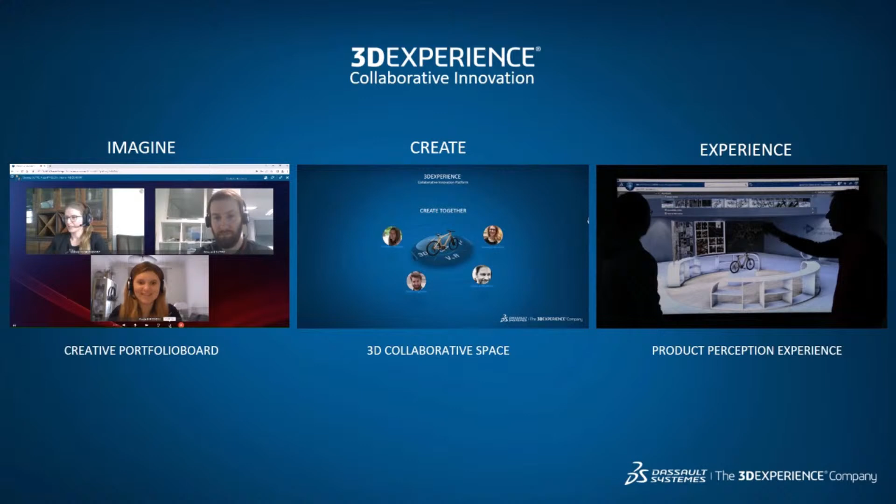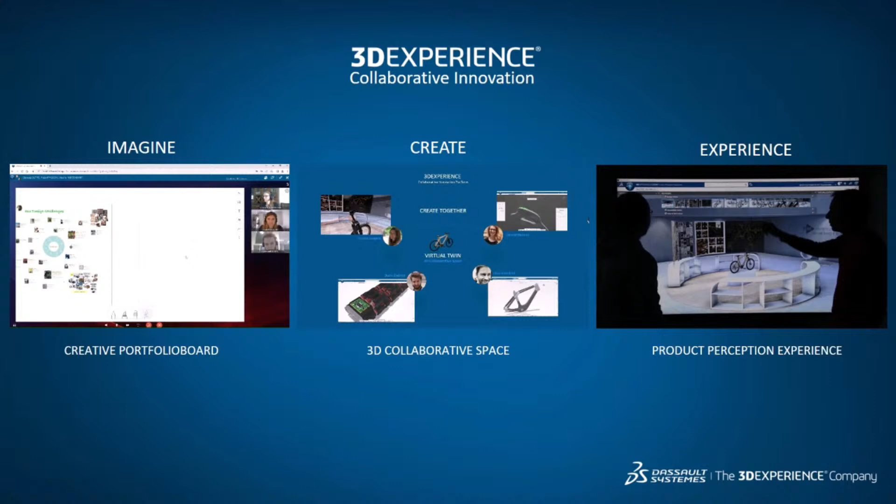It starts by imagining together, and we have applications like 3DSwym Communities with conversation, video conference, but also Creative Portfolio Board, a new application to do collaborative whiteboarding, to brainstorm all together even if you're in different locations and facilities. But then it's about creating it together, or co-creating together.

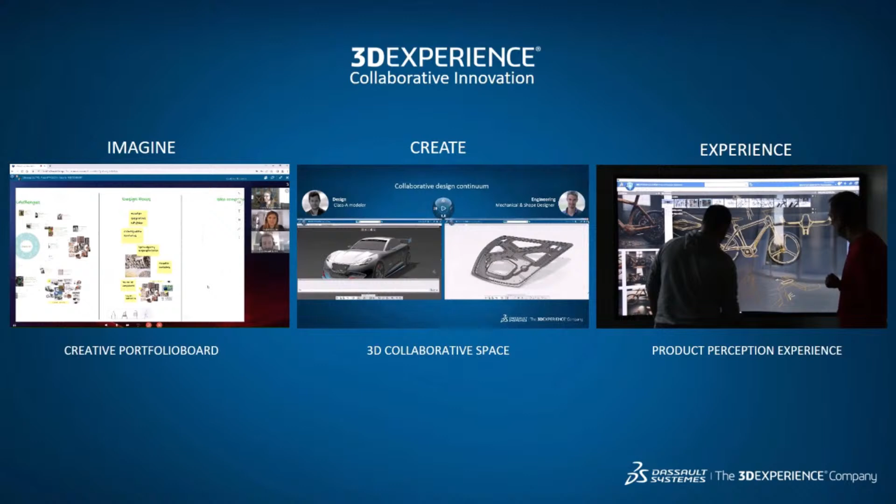And for that, we have on the 3D Experience platform the virtual twin, where everybody can connect to bring their talent. You can be a creative designer, a color and trim designer, a studio engineer, a class A modeler, or a decision maker. And you can work seamlessly all together to co-create on the virtual twin.

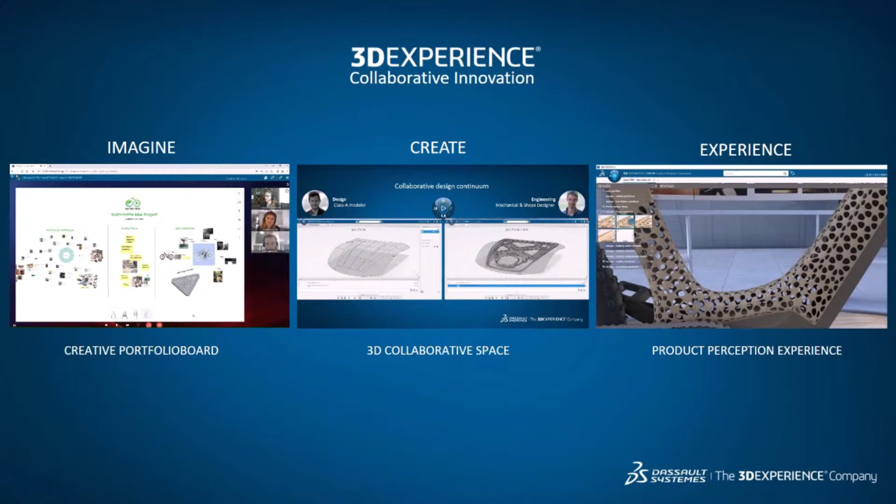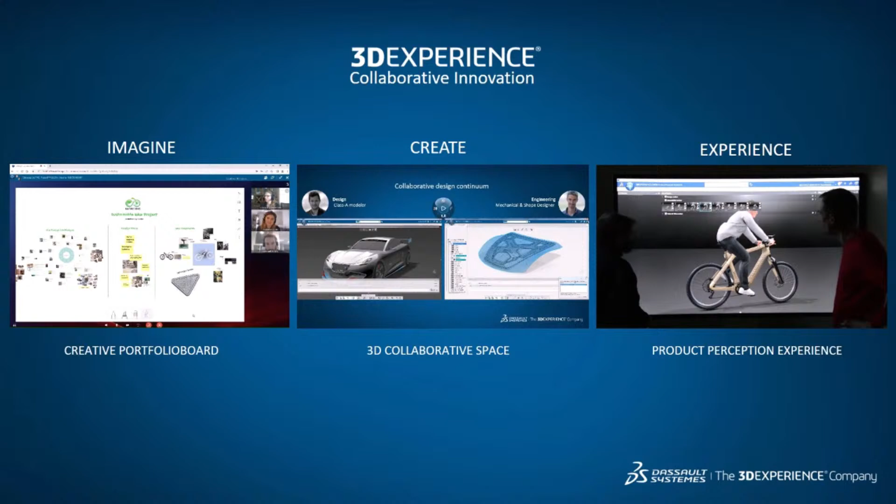And third, to experience together on the 3D Experience platform at any time of the project and the evolution of your virtual twin. You can meet all together around the virtual twin to visualize it, to experience it on screen, on touch screen, or virtual reality, to check and decide on the different experiences that you wanted to imagine. So the platform is the first element of this new studio of the future.

The second element is the daily job of the design studio, how to imagine, create, and experience in a unified workflow environment. And this is where our 3 disciplines are mandatory.

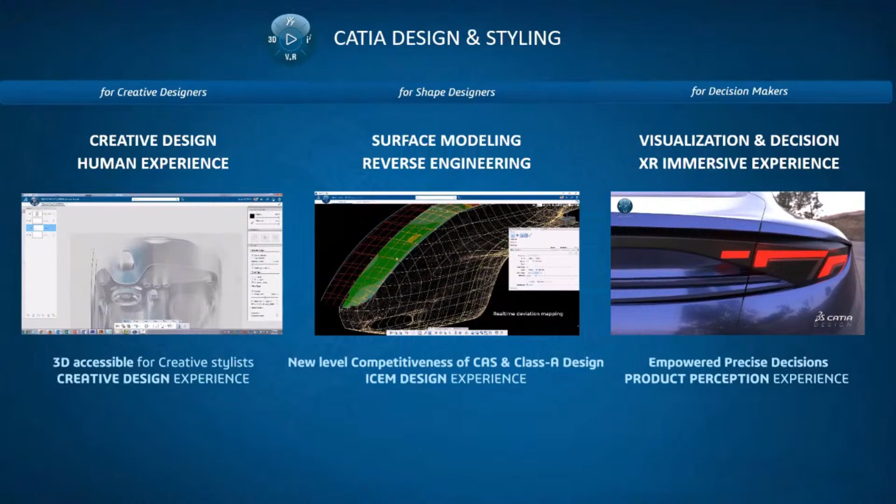And for that, we have created the fundamental pillars and applications: Creative Design Experience to give 3D accessible to creative designers, ICEM Design Experience to give the next level of productivity and competitiveness to do 3D modeling from CAS to class A, and also Product Perception Experience to present, brainstorm, and make decisions on the virtual twin. And this is what the team will present today.

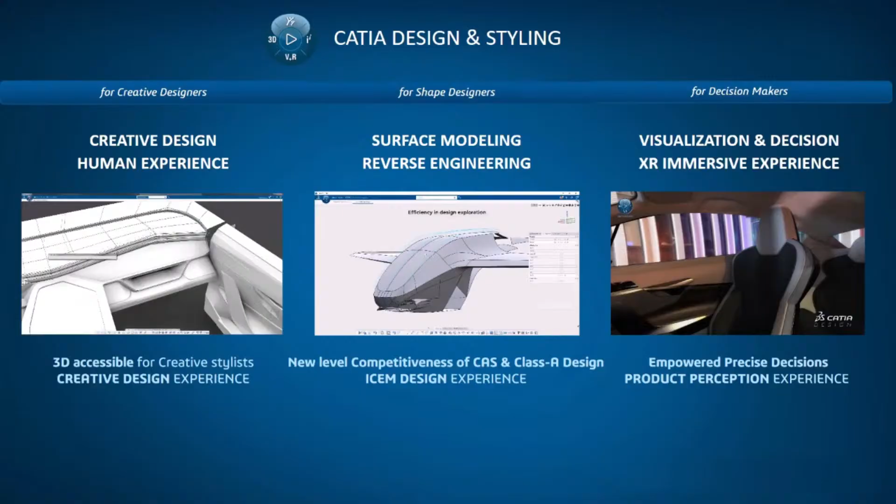Okay, so this looks very promising for the design studios. And you mentioned an interesting benefit, which is the unified design workflow, starting with creative design. So François, you are director of this part of the portfolio. Can you tell us more about it?

Sure, Alan. So what is important to understand is that our mission is to help our community of users transition from product design to experience design thinking, like Xavier said earlier. First, by delivering to our community of users the proper tools to help them innovate during their creative design process, by providing innovative technologies mixing curves and surfaces together to go further and faster into their design exploration.

Second is to turn to the human experience approach, thanks to the virtual human, to start to evaluate the consumer experience of the product our designers are creating. And third is to take full benefit of the new approach of design by algorithm, which is very powerful for design exploration and automation.

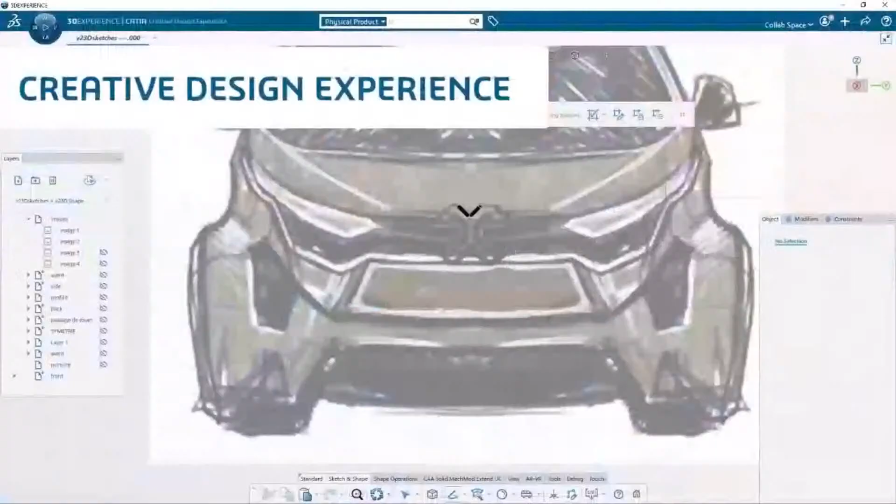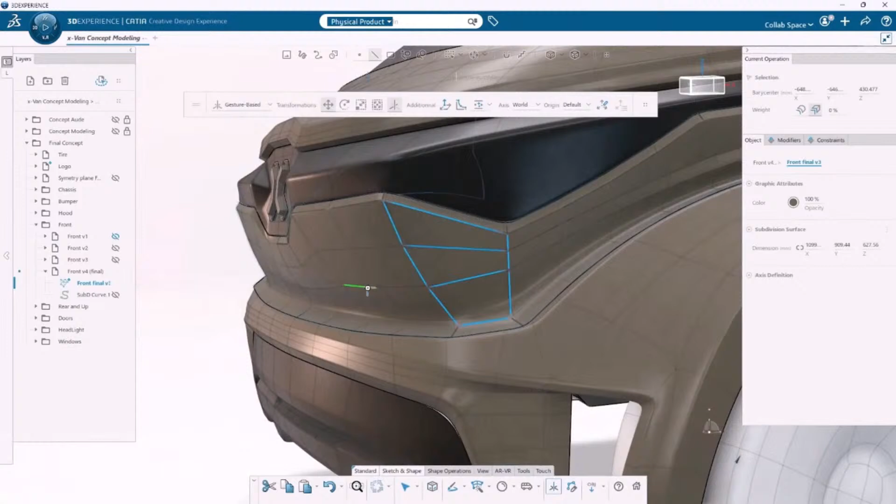So for this release, we are pushing a lot on the facility we offer to our creative designers to express their ideas, to explore their ideas in a very intuitive way, by new technologies, new user experience, to go faster, to be more precise, so to reach the proper design according to what they want to achieve. But also to accelerate their conceptual modeling phase with new capabilities to be more precise and more productive in the end. And this year, the key feature from our portfolio that we want to expose is the ability now that we offer to our users...

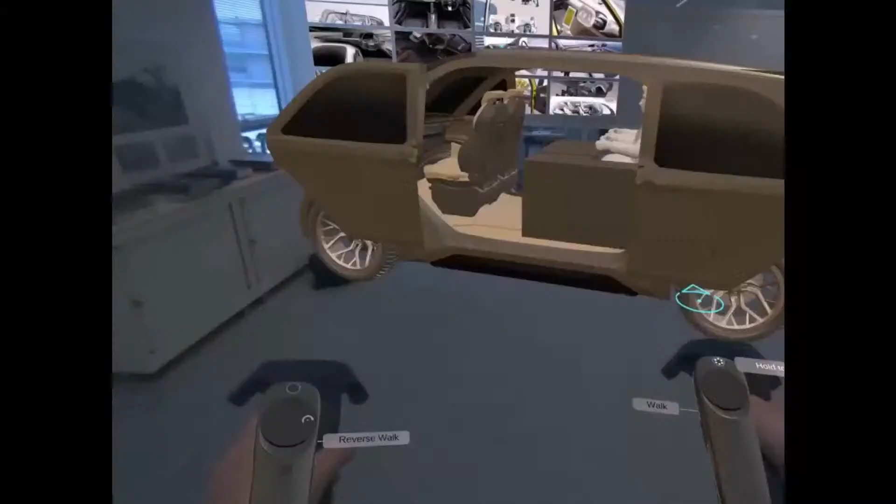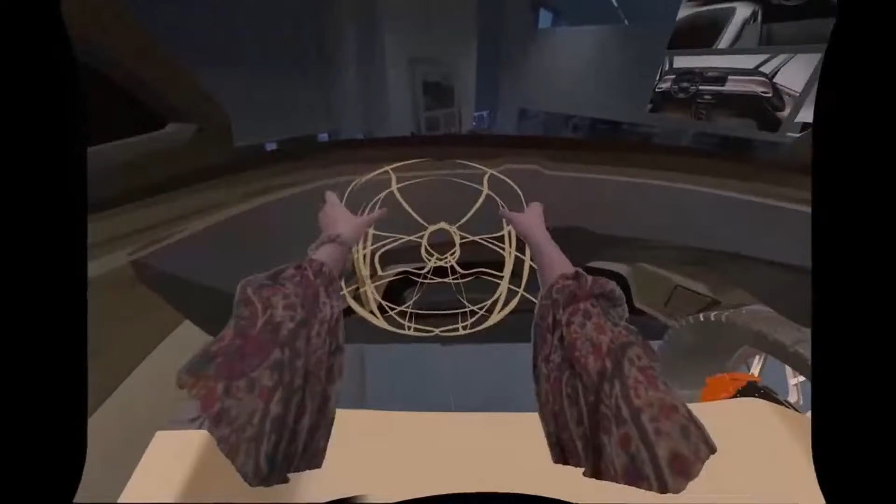The capability to enter into the mixed reality world, the virtual reality, but also the mixed reality. So it means to take benefit of the virtual and physical environment to better design their product, having visual reference, real visual reference during their creative design process, to measure the impact of their design according to the perception, the dimensions of their designs, so to be more productive, more precise.

As you know, we are also serving our community of users with our legacy application, Imagine and Shape, which is well deployed on the market. And we are improving this application based on customers in production's requirements.

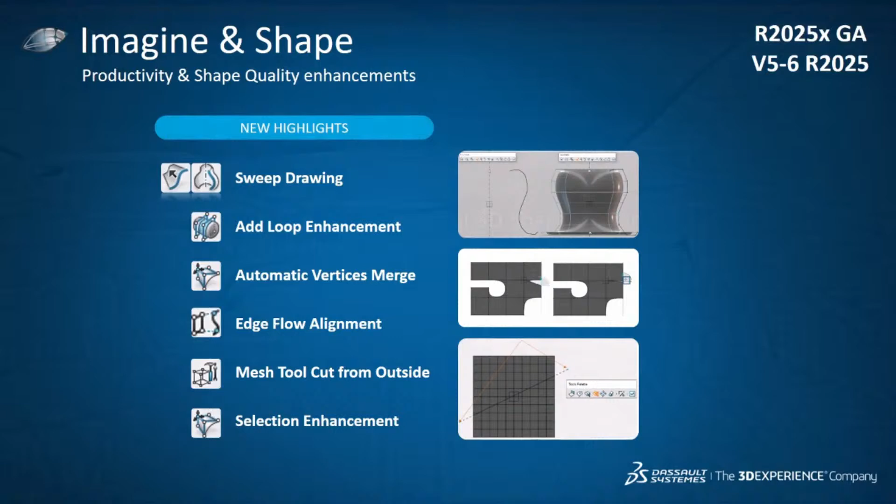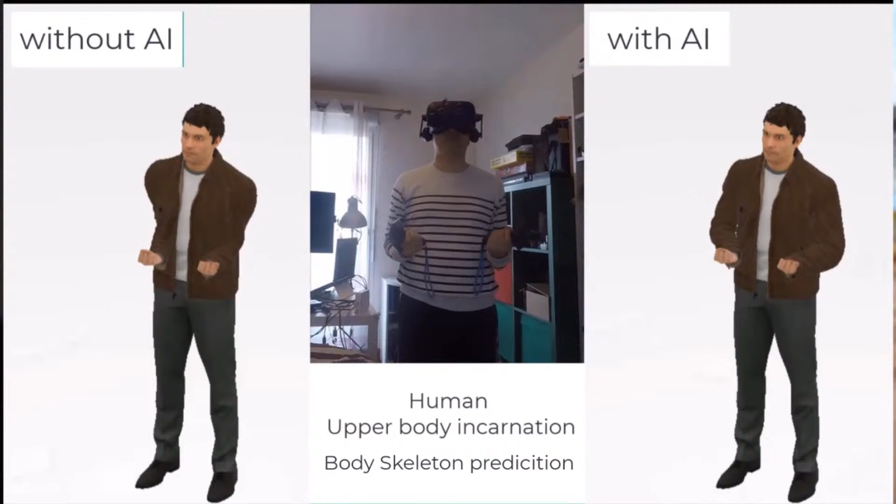One other pillar of our portfolio is to turn from the product design to the experience design, taking benefits of the virtual human. It is very important for our creative designers to take benefit of this representation of virtual human, leveraging the virtual AI capabilities to immerse into the environment, incarnating the human to evaluate the consumer experience of the product.

In that particular example, it's a way to manipulate objects from the environment and evaluate the accessibility, the usage of the product from the user standpoint.

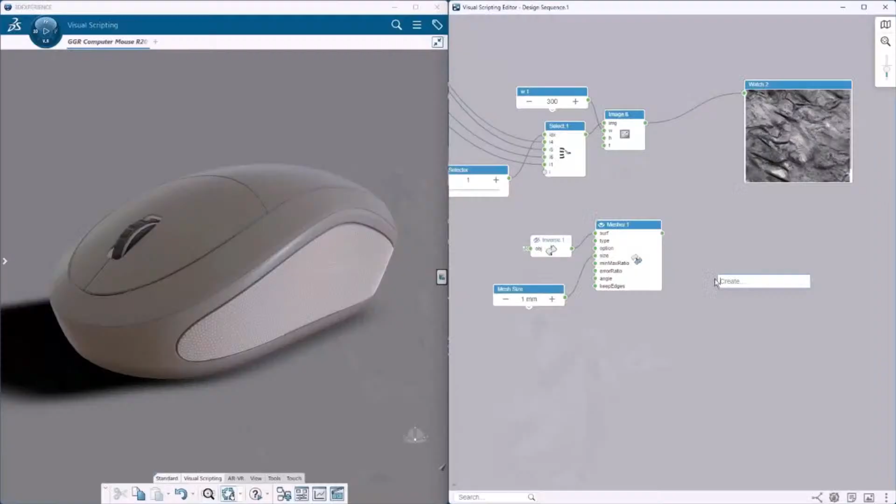One important pillar for us, a strategic one, is to take benefit of the visual scripting approach, which is parametric design, based on the visual scripting approach, to explore variants of design very quickly in a very efficient way, to create new type of surfaces based on inputs, like in this example.

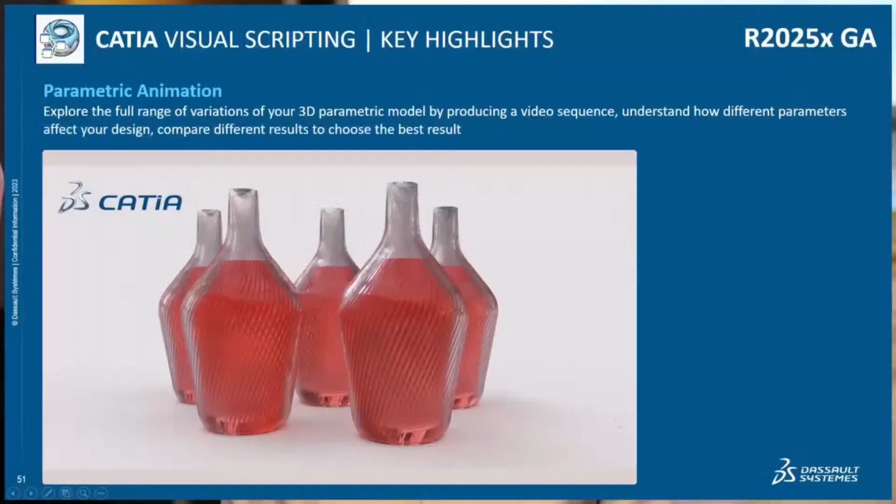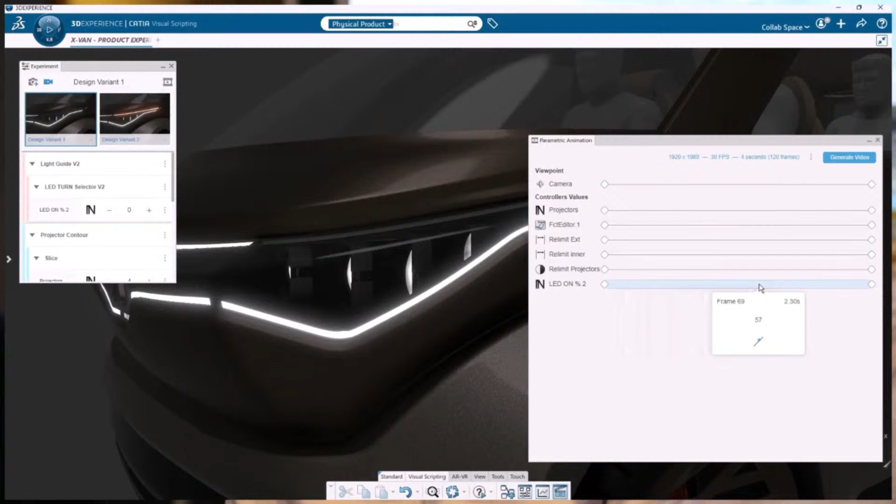Another key highlight of this release in the visual scripting application is also the ability to create some animations, which means to produce some video sequences based on the parameters and the multiple variants that the designer is producing, to better communicate, better share the design ideas within his ecosystem. Thanks to the visual scripting approach, it's very fast and productive to reach this type of media to better assess the quality of the design.

So here we have an example in the lighting domain, which is a new domain we want to explore with our portfolio. Okay, so a lot of great improvements for creative design and human experience.

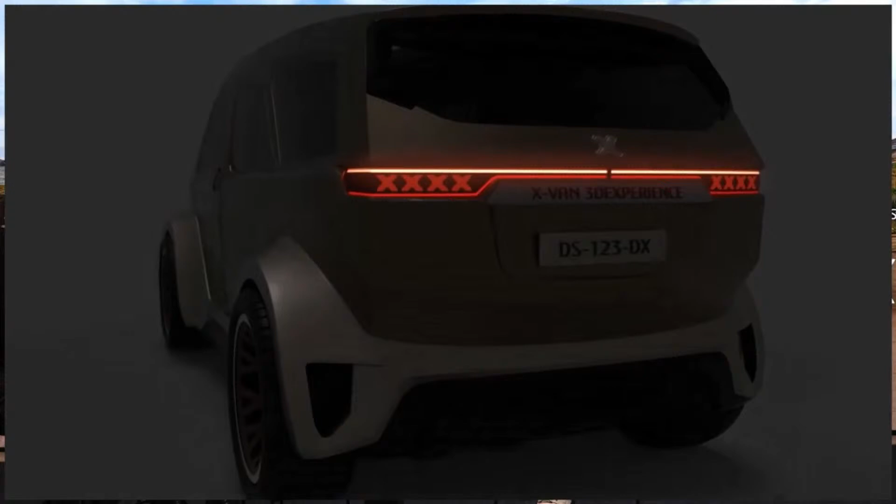And what about the next step of the workflow, which is surface refinement? Well, surface refinement, Laurent, you know, it's a matter of expertise mostly.

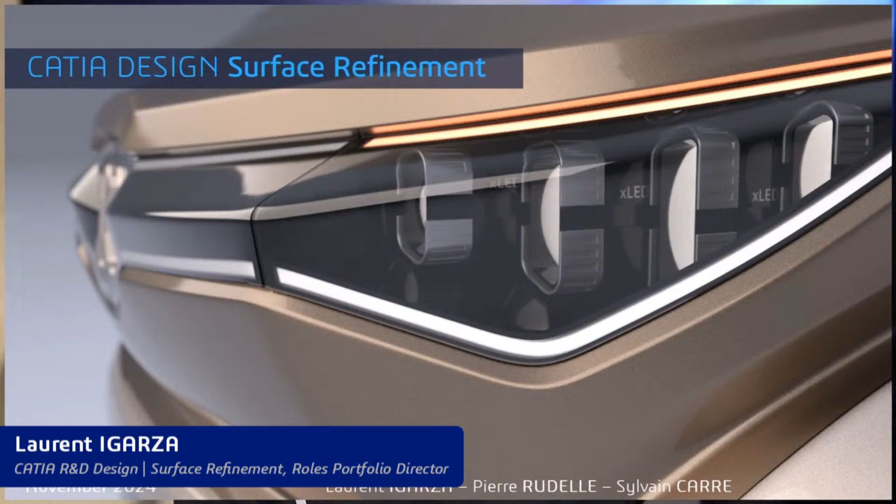So in surface refinement, we of course embed reverse engineering and Class A modeling. For reverse engineering, our motto has always been to really push productivity, favor semi-automation, and quality of the result, predictable quality for the result. So I consider 25X Golden Release as a kind of achievement milestone because we are finishing now really all the manual workflow we wanted to address.

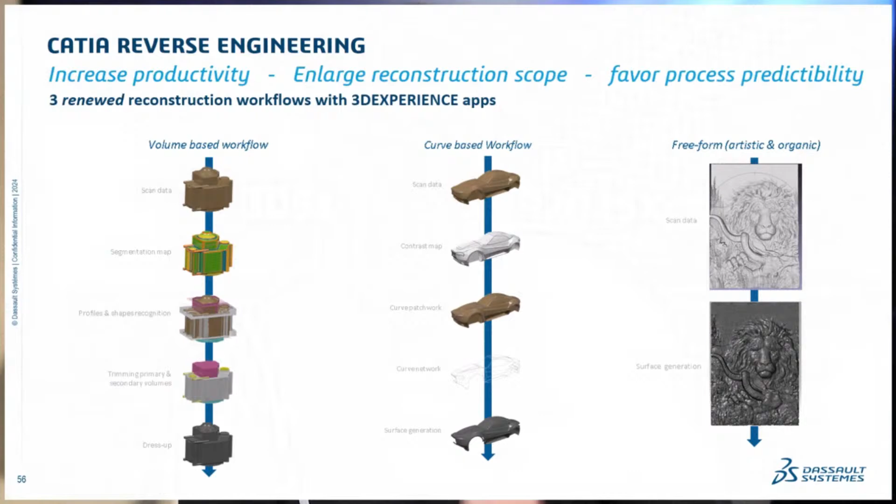We finished with this release the mechanical workflow, knowing the freeform one and the curve network one were already finished in previous releases. And well, I think now we have all the bricks to go further in automation in further releases. So I hope all the prerequisites to do the workflow manually are there with the right quality and the right speed.

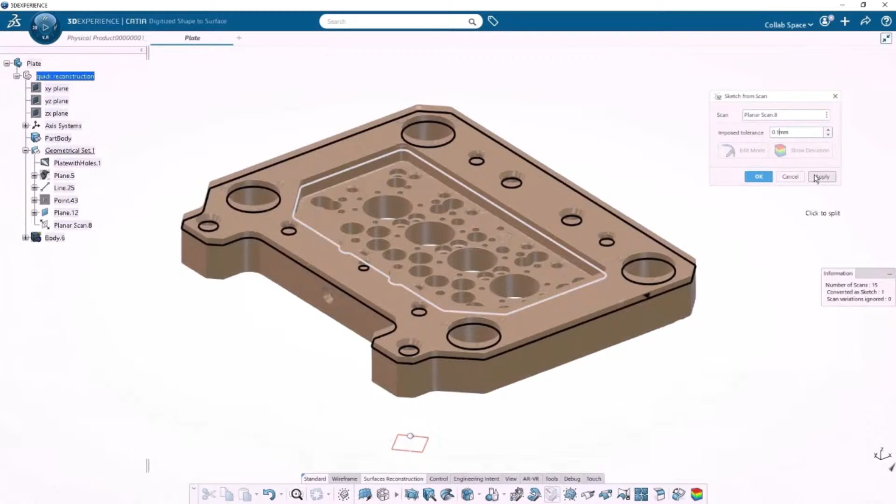Okay, so for reverse engineering, it's going to be very interesting in the coming years, but you have the mature solution right now on 25X Golden Release.

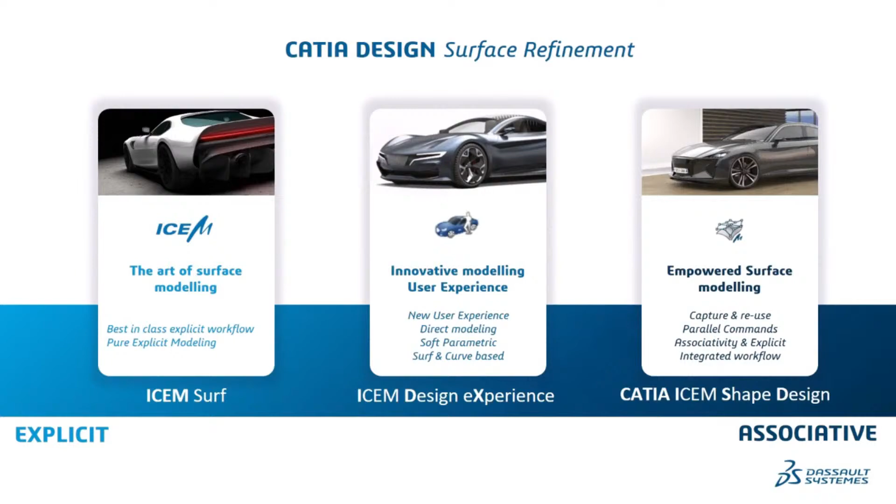For Class A modeling and CAS modelers with ICEM Design eXperience, we've been delivering the new generation of application able to mix all mathematics, modeling approaches by innovation ways and old ones, and associativity of the model. And this release, we are really focusing on the accessibility of commands to be more productive.

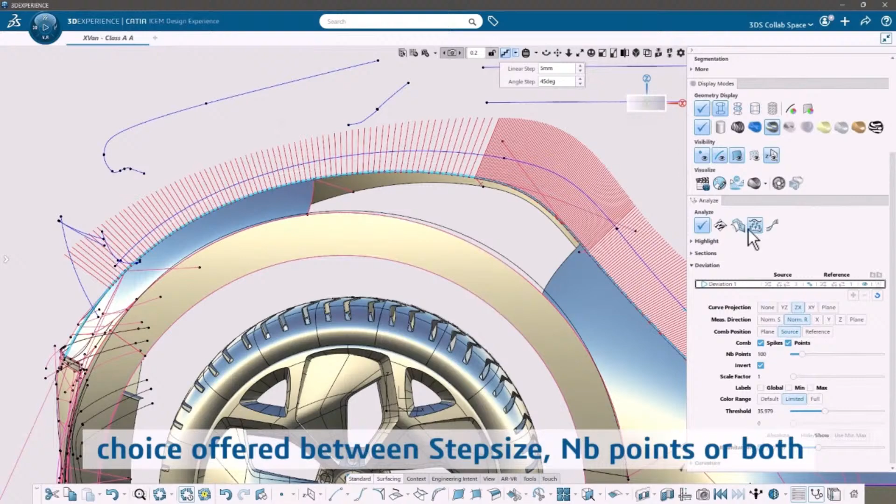So we are preparing kind of new UI for the next FD. So we have been working a lot on putting access easier for the user. We've been, of course, improving the key features such as the visual clipping or the fillet, which is very powerful. And last but not least, we are delivering factor 3 for performances against last release.

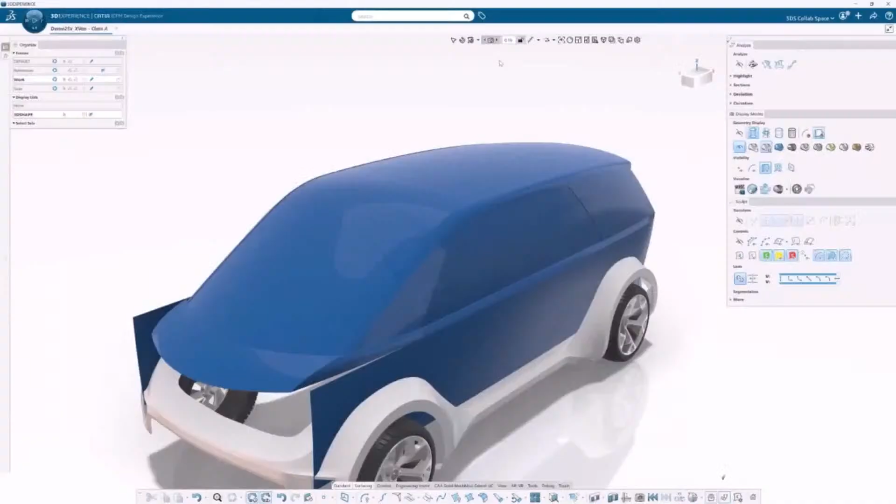So it's much better to get real-time changes. I hope our users will like it, and we'll go further with those new tools for innovation in modeling that they've done traditionally the same way for many years, and we hope they will like it.

Great new capabilities for reverse engineers, Class A modelers, and surface modelers as well. Exactly, and great performance too.

And now concerning V+R product experience with Stefan Ritz, I think it is a pretty rich release for this discipline. So Stefan, what are you bringing to our users? Welcome to our V+R product experience, what's new in the R 2025X Golden Release.

In our discipline, we take care of collaboration and decision-making inside design and engineering. We offer visualization on the consumer's view of the product, decision-making tools on product experience and comfort, and we help users immerse themselves with the product and its environment with mixed reality solutions. For 25X, I'm also happy to introduce new validation capabilities inside our visualization portfolio.

Let's go directly to visualization and the application CATIA Live Rendering, which provides high-quality visualization directly on 3D design and CAD data for collaboration purposes.

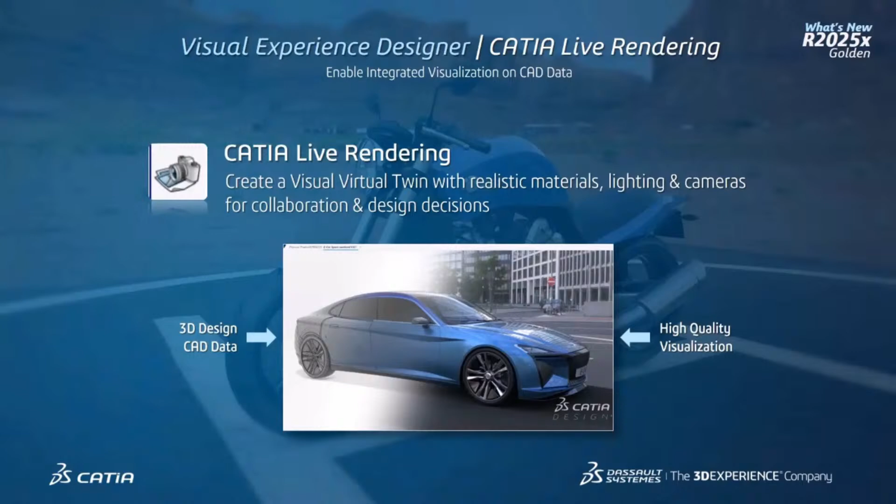So the stellar interactive render mode actually gives you the best of both worlds and builds a bridge by enabling global illumination in an interactive way.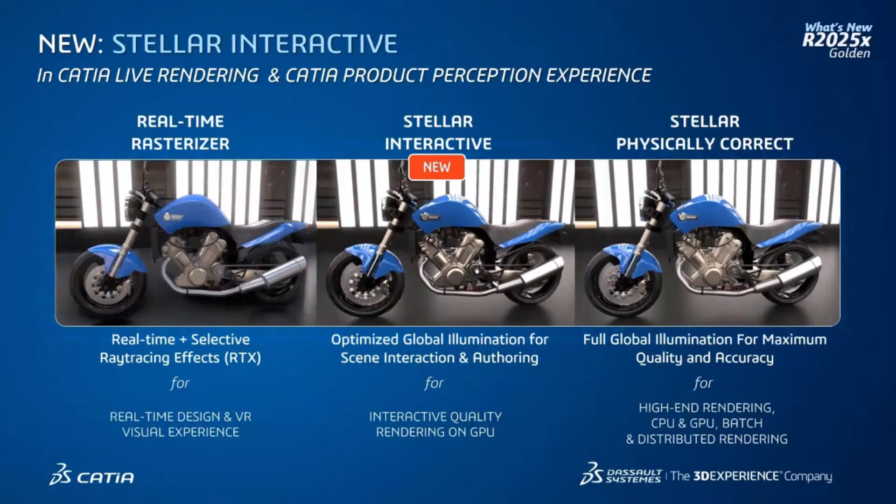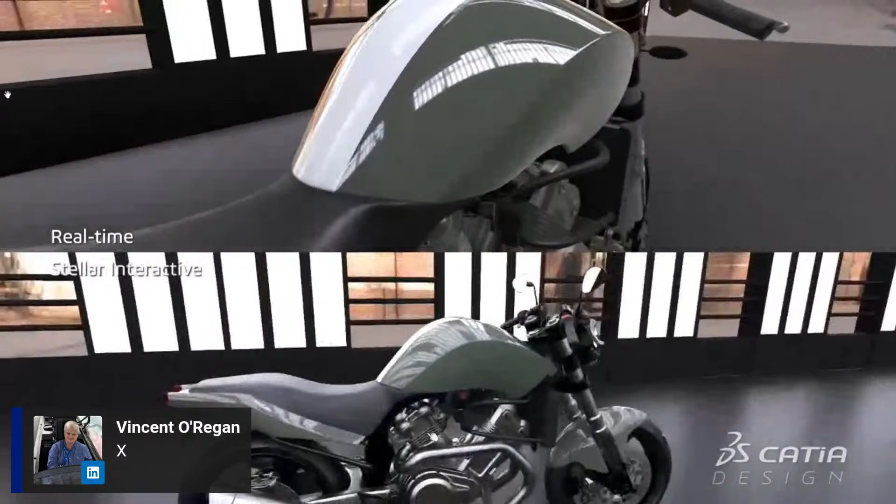Let's take a look at an example. Here you see the rasterizer on top and stellar interactive below, and it shows directly that lamps and lights from the tunnel are now displayed in the interactive stellar mode. You can not just display the light, you can also adjust it, as you can see here with the light color, and this is displayed directly on your design data.

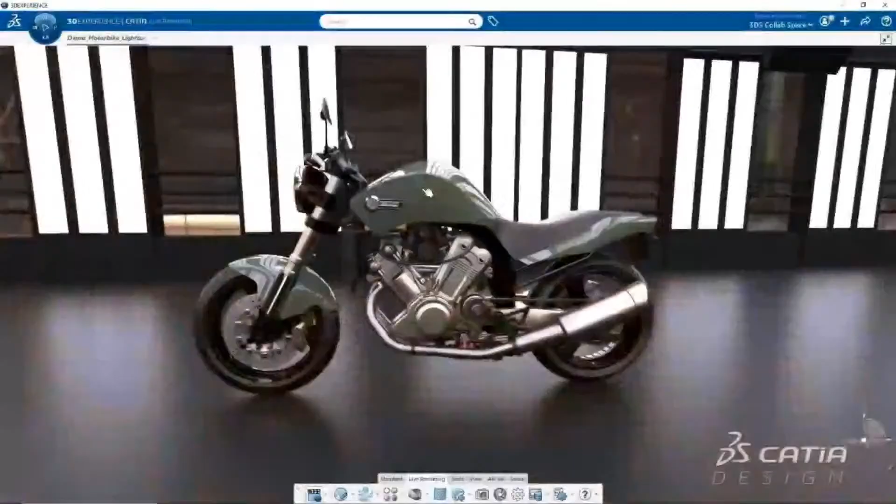You can keep going—interacting with the light, you can also change the color of your material, for instance, and you see the reflections are adjusted directly. To show you that we are still in ray tracing, I'll show you also the reflections of the reflections here in the mirror.

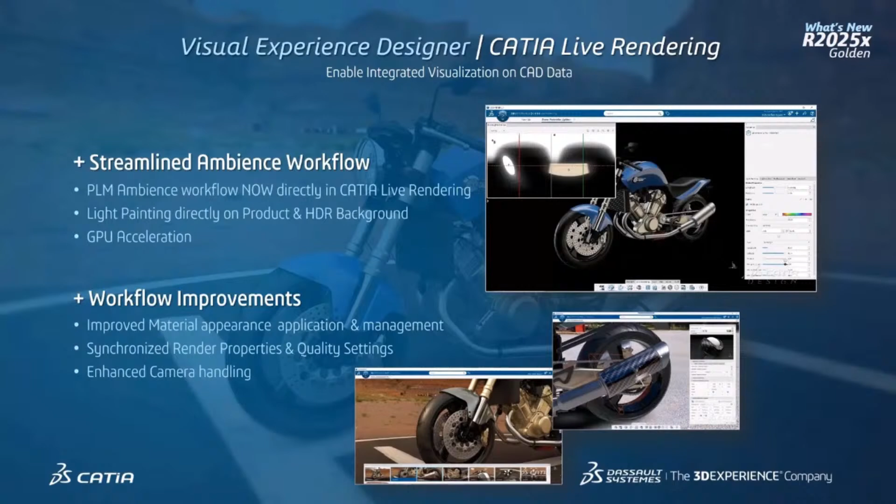Live rendering is also improved with a new streamlined ambience workflow. You can now completely work with PLM ambiences in CATIA Live Rendering, including light painting, as you can see here in the video example. And all of this is GPU accelerated.

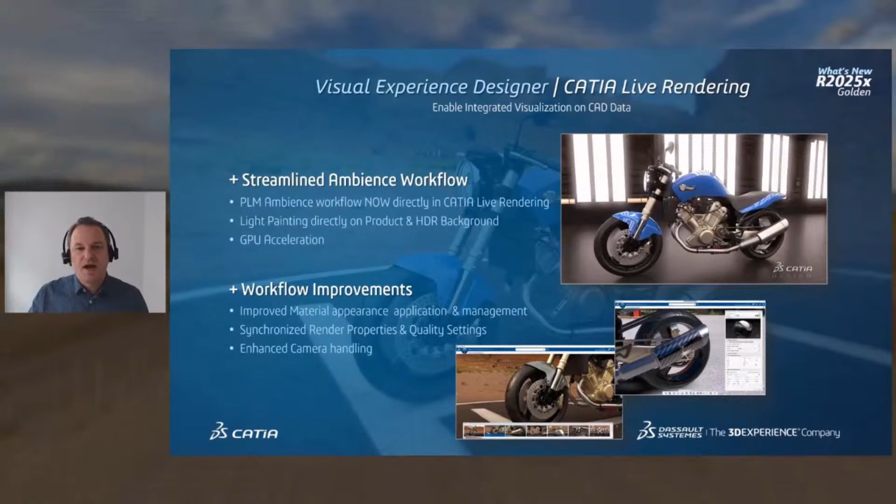The application is improved in many more ways, but I'll accelerate a bit here because I want to come to the next chapter, which is the new capabilities for validation in our portfolio. For this, we now have a new application available called CATIA Validation Rendering.

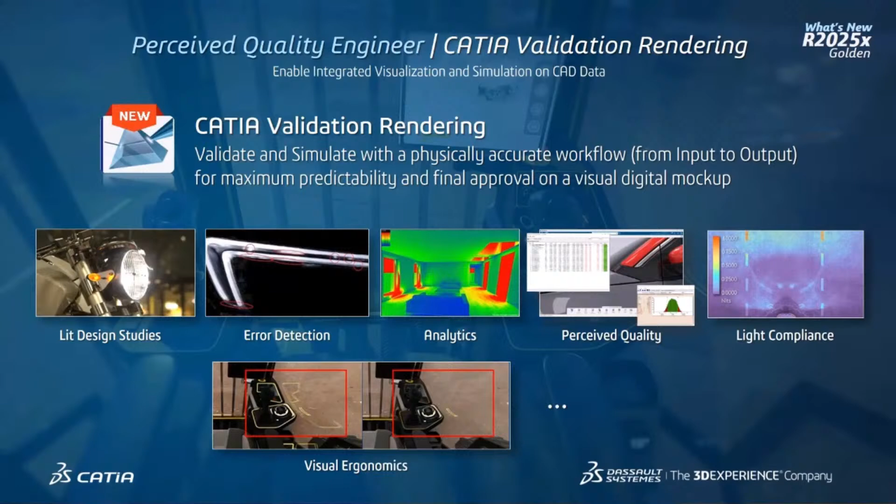It brings you the capability to validate and simulate with a physically accurate render pipeline from input to output. This enables a lot of new use cases, as you can see here in some of the examples on screen. How do we do this?

We take our physically accurate rendering, our Stellar physically correct rendering, and take care of the parameters for the rendering. For materials, we have accurate display materials. For ambiences, we have physically accurate light intensities. Lighting can now also be rendered with analytical passes, or we can use measured supplier data. And cameras take into consideration eye physiology, the perception of the eye, and precise outputs.

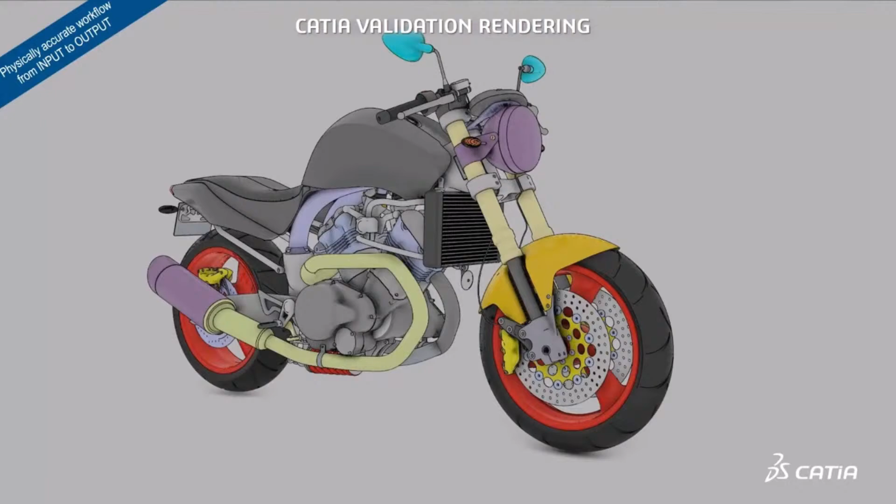So far for the theory—let's jump into an example. You see here our CAD data, a bike. You can apply the measured materials. You can also add an environment with physical lighting conditions.

This might already be interesting, but it gets more interesting when you switch to night, because then you immediately want to switch on the light of the bike. We can do this by using measured supplier data applied to the lamp of the bike. We can switch it on, and in reality you would not perceive a lamp like this at night—you would also see a certain glow because of your eye physiology.

This we can also switch on, and the lamp itself is very interesting—analytics here already give you very good results. But on top of that, you also want to see the lighting from the whole environment on your design model, and this can also be integrated by switching the environment again.

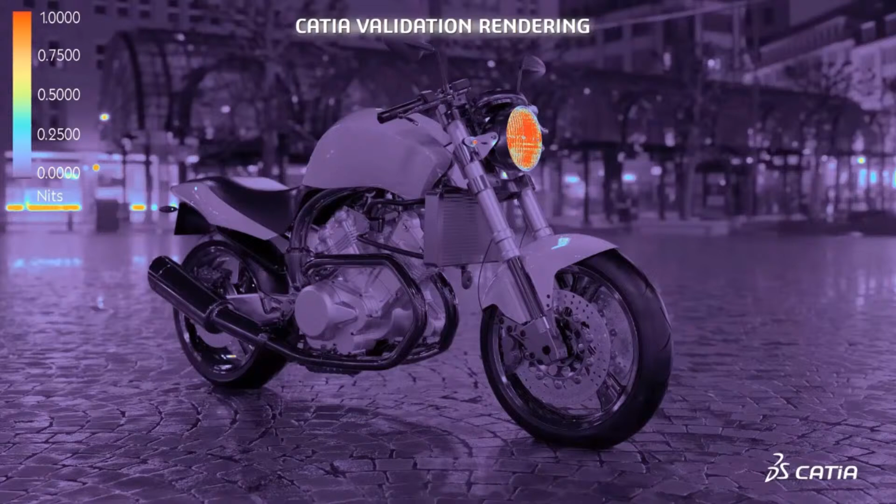Our engineering capabilities built in here are not ending just by seeing a design model and judging a design model. You can also run analytics here with a luminance pass, which gives you the capability for quantitative analysis. And this enables engineers not just to go into a view and review of the lamp itself, but also of its functions. For this, we change perspective, and what we see in here is actually the light fall off of a car on a street.

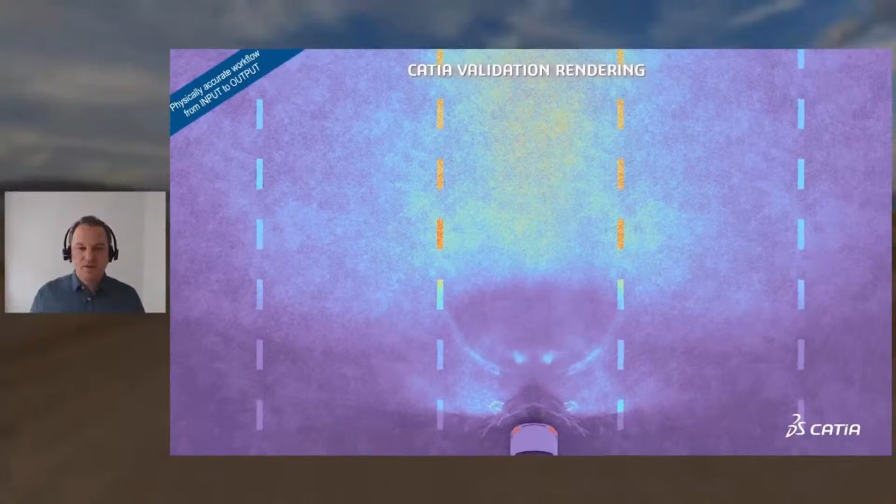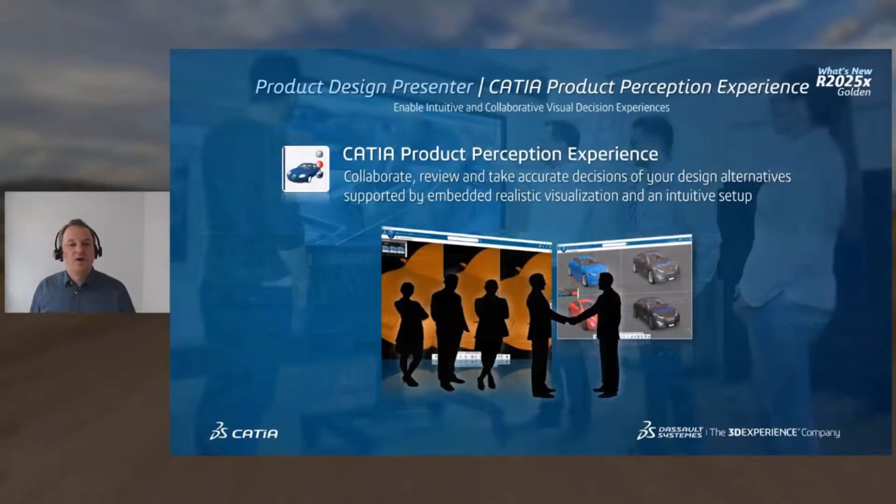And with the analytic luminance passes, you can analyze this light fall off now in terms of well-lit areas and not well-lit areas. So many new capabilities with CATIA live rendering, validation rendering in the R2025X Golden Release. Let's now take a look at decision making and what's new on decision making with CATIA product perception experience, our application to do decisions on different variants.

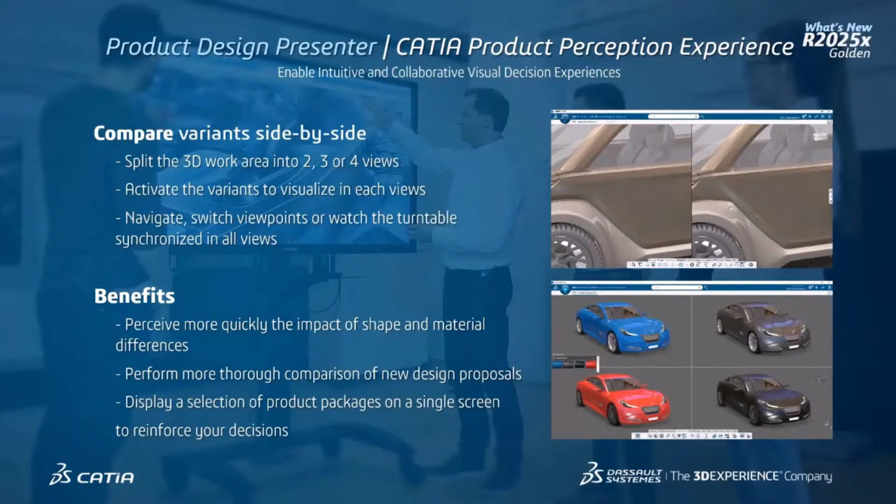And in the R2025X release, we actually bring in a very interesting new capability, a compare tool, which is enabling a 2, 3, or 4 view comparison of different variants, as you can see here. And this comparison is synchronized in terms of view and also turntable activities. And now you can switch through the different versatile options directly here, and you can see the synchronized view is enabling you to make a straight decision.

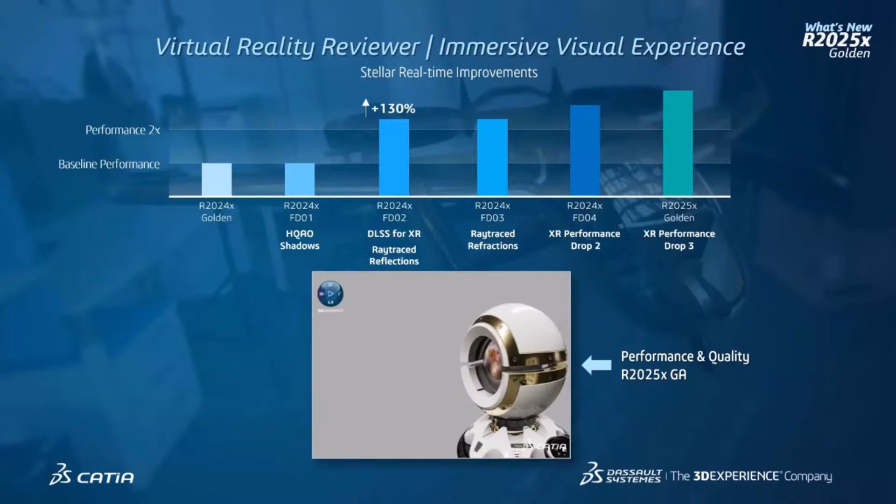I will round up with just a quick introduction on what's new for the CATIA immersive mixed reality capabilities. And for them, we have improved the performance between the 24X Golden and the 25X Golden massively. So constant improvement over all the releases of the last year. And in parallel, we have brought in HQAO shadows, DLSS, ray traced reflections, and refractions in our rendering capabilities.

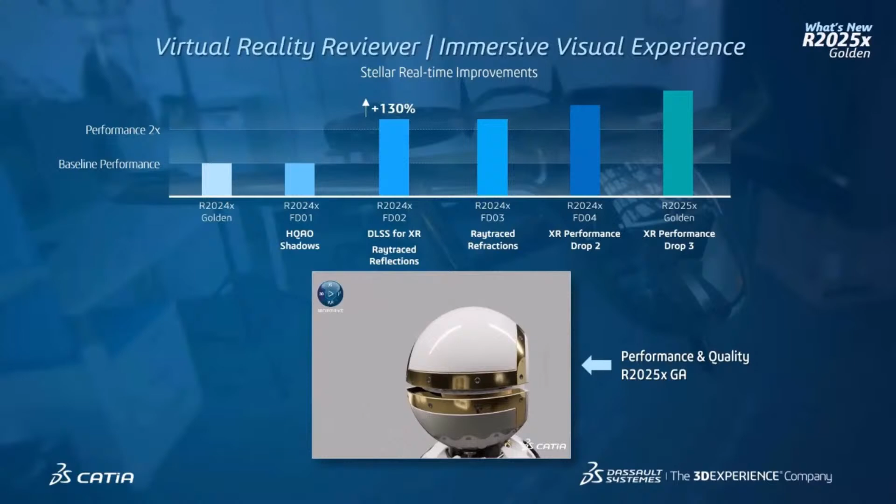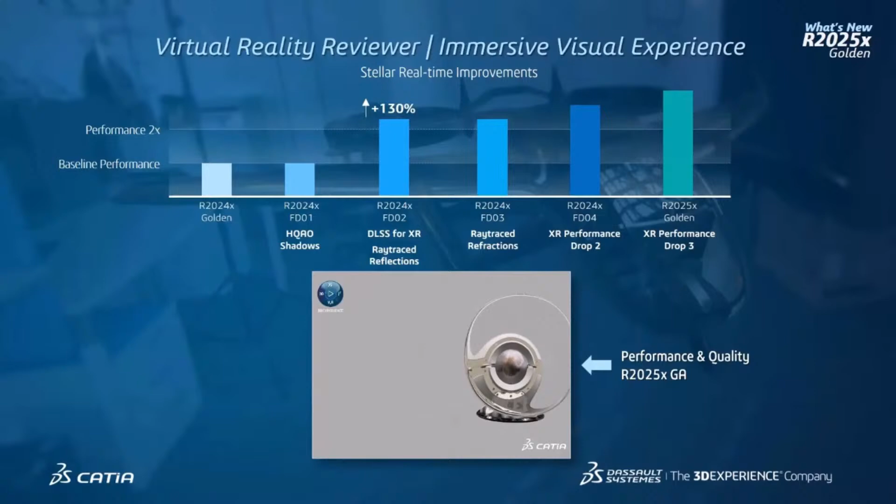And this is enabling very interesting new use cases, as you can see here below, by seeing live the environment reflection, the reflection of the controller, but also refractions, as you can see with the lens that is just displayed in this moment. And this is all possible inside immersive views now on the 3DEXPERIENCE platform with the 25X Golden. So all in all, very interesting new capabilities in the 25X for the different disciplines and different subjects in our area. I'm looking forward to the webinar very soon to show you more details.

Thank you, Stefan. Indeed, a very great release for V+R product experience. So now, Xavier, you mentioned 3 main elements for this new release, 25X. And what's next now for design and style? Yeah, good point. I was mentioning that with some customers, we imagined the studio of the future, which is a reality today with the release 2025X, founded on 3 elements.

The first one was the collaborative innovation, how to boost the collaboration and innovation all together. And for that, we have the wonderful 3DEXPERIENCE platform, which has reached a very high level of maturity to do so. The second one was the design workflow with a unified environment to imagine, create, and experience. And the third level is how to go to the next level of design, to imagine the next generation of products. The products are not anymore just beautiful aesthetical products in terms of shape, colors, and material, but they are becoming much more interactive products with the consumer. That's why moving to experience thinking is very important.

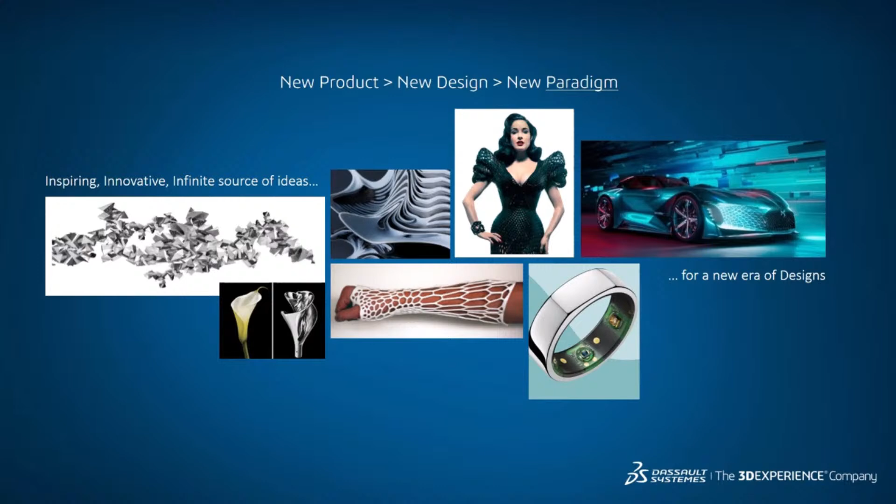And to do so, we had to move our user community, the designers, to the next level of design, to explore and automate, as I was explaining, and for that, using different technologies. First of all, by taking benefit of all the intelligence that you have on your product, from the specification, the parametric approach, the features, to automate things, but also to bring that to a next level of automation with templates. So you can create intelligent templates for other people, or go to the level of automation with algorithmic design, also to explore new ideas and to automate things.

And on top, you can also create new typologies of design with a more scientific approach. And this is where science meets design with generative design, where topology optimization and simulation can inspire designers, or to combine and merge modeling and simulation together. For example, to simulate early in the process the aerodynamics and performance of your design, and the simulation is even driving your shapes. So it's also inspiring in terms of science.

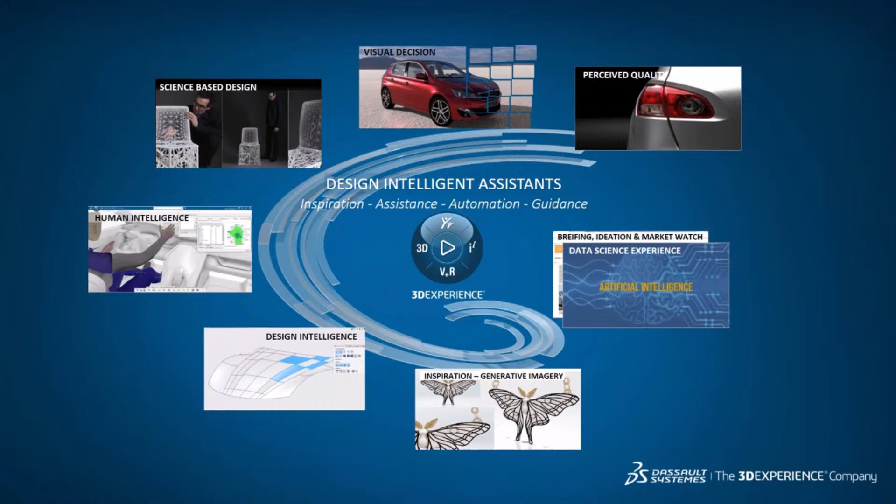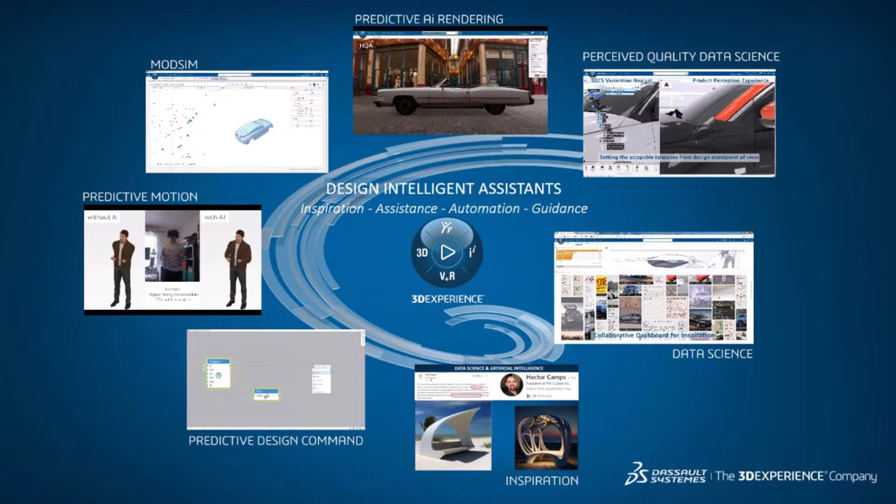And last but not least, data science and artificial intelligence in many steps of the design process can be used to help designers look at the trends on the market, or to be inspired by images, or to be much more efficient in terms of design with predictive commands, predictive design, or user guidance with some agents.

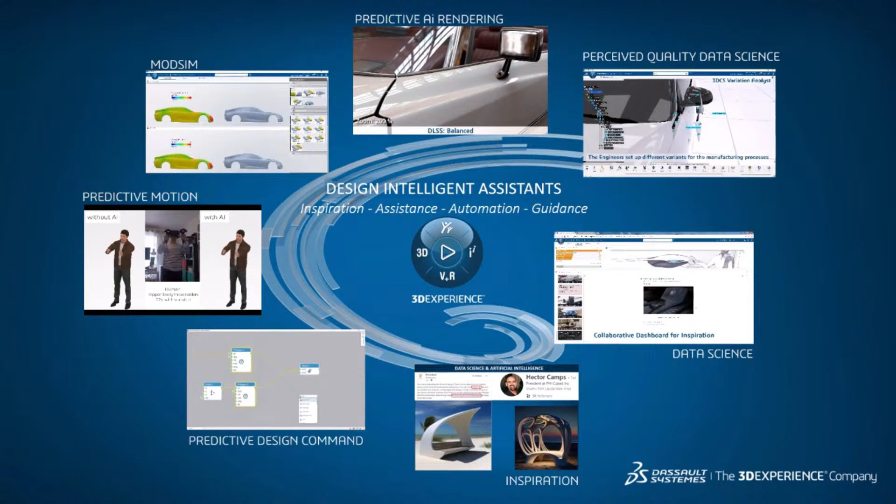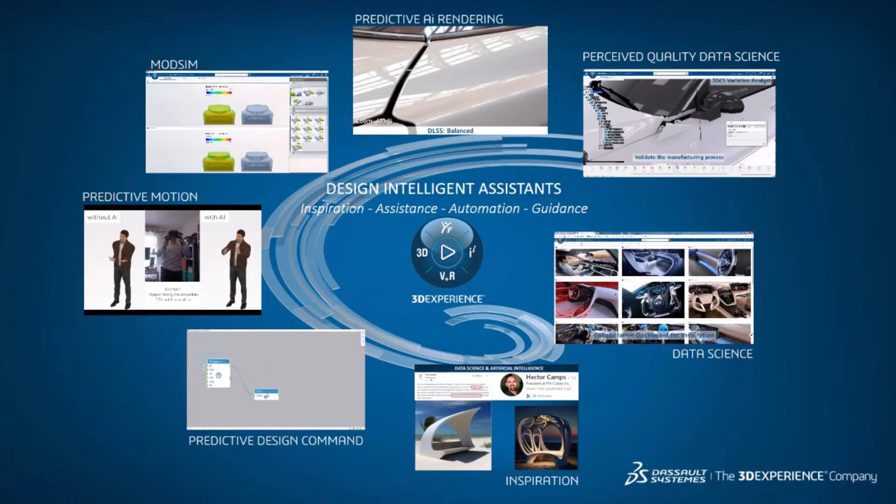Or you could see it also with humans to predict the motion of the human, or to do a science-based simulation, or even for rendering and real-time visualization. We use a lot of artificial intelligence and deep learning to accelerate and predict even the pixels on screen for real-time rendering, or even now immersive experiences with virtual reality and augmented reality. So with all that, we are bringing the designer to the next level of automation and exploration.

All right. Thank you very much, Xavier. Thank you very much, all three of you. I'm looking forward to seeing these new capabilities on CATIA and the 3DEXPERIENCE platform. And we expect a lot of customers showing us what they do with this. We are ready. Yes, of course.